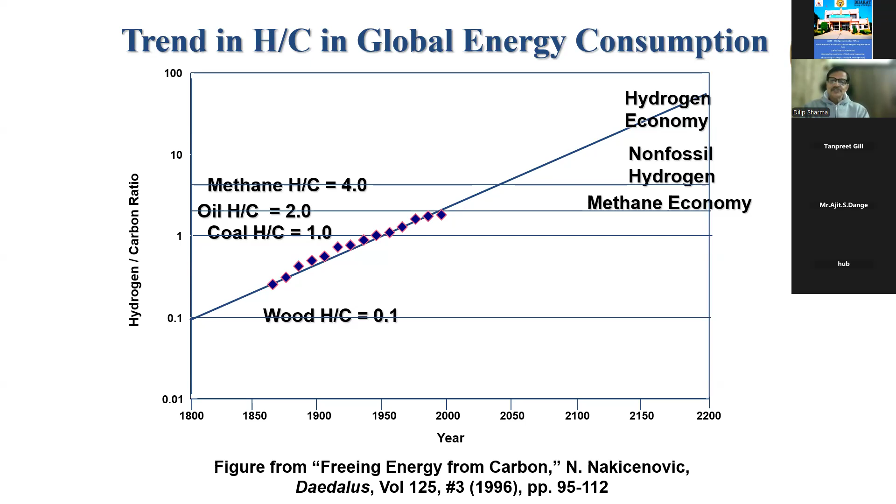And if we extrapolate this, we can say the future fuel would be a fuel in which the hydrogen by carbon percentage would be infinite, which means we'll not have any carbon in the fuel, and that fuel would be hydrogen. So the trends are also indicating that hydrogen is going to be the future fuel for us.

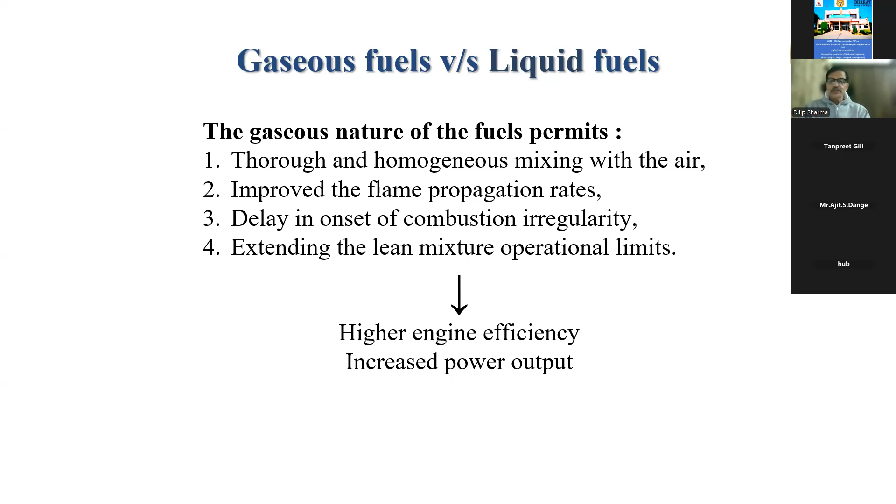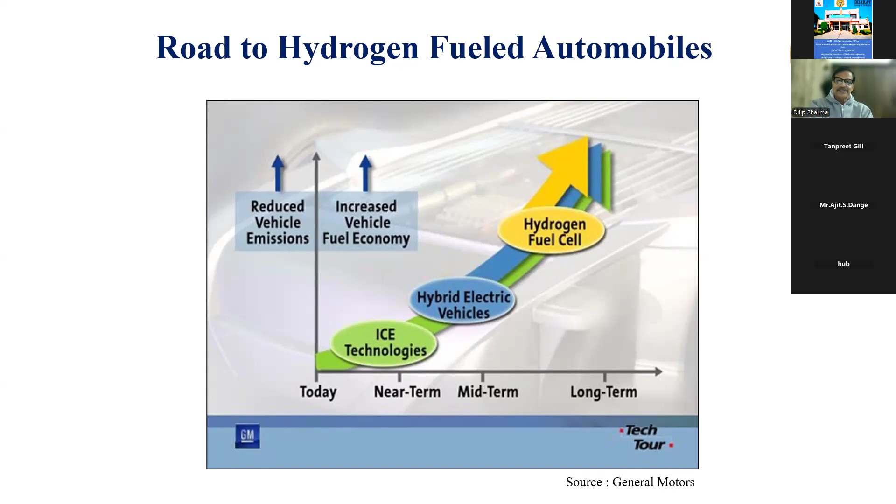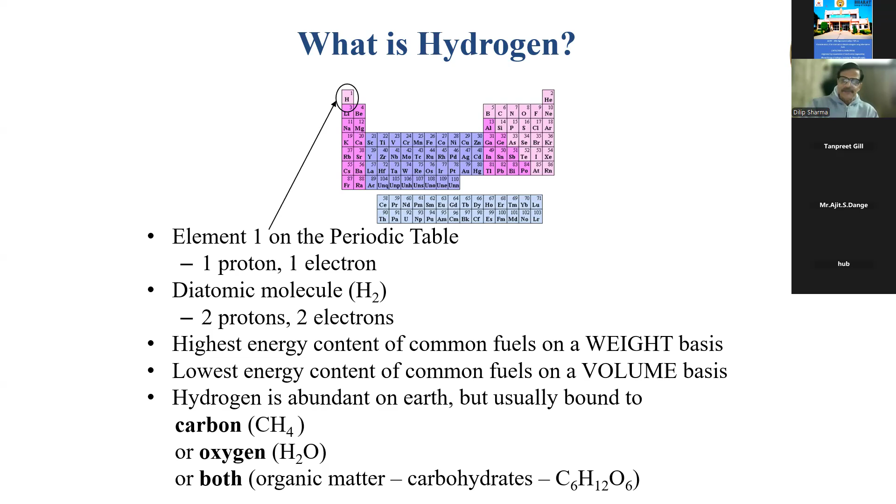Hydrogen is abundantly available combined with carbon or oxygen, examples being methane and water. All organic matter contains carbon, so carbon is abundantly available. Hydrogen is not found in abundance in a pure state, but it's always found in a bound state with carbon or oxygen. It's the most abundant element available in the universe.

It's a gas under standard conditions. It liquefies at minus 253 degrees centigrade. Another interesting thing, it's odorless, colorless, non-toxic and non-carcinogenic. That means if there's a leakage of hydrogen, you won't be able to see it or smell it. That's why the hydrogen cylinders being supplied nowadays intentionally have odorant and colorant added to them.

Hydrogen burns very fast, so it's a highly flammable gas. Since there's no carbon available in the fuel, it will not produce carbon monoxide, carbon dioxide, or particulate matter. Because it has no carbon, the flames are not visible since it burns without a flame. Now, when it burns in an internal combustion engine, because of higher temperatures, it reacts with the nitrogen available in the atmosphere and produces NOx. So that's the only emission hydrogen-fueled engines would produce, NOx emission.

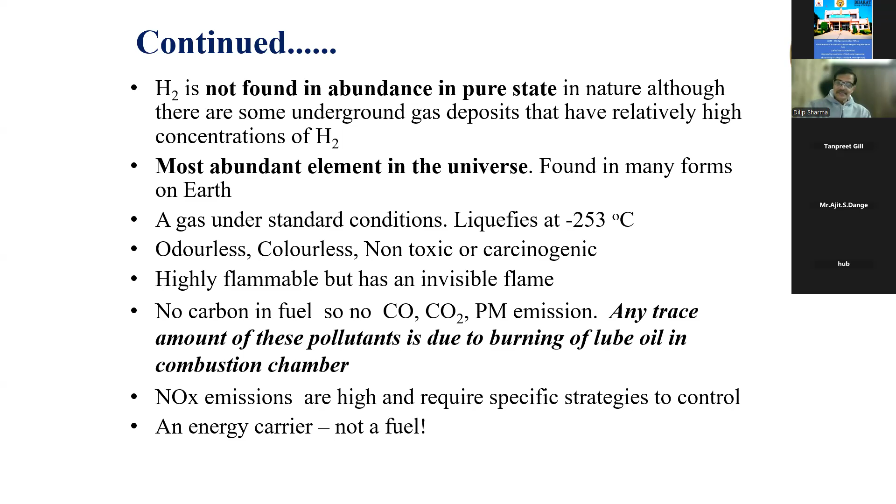And we can call it an energy carrier, not a fuel.

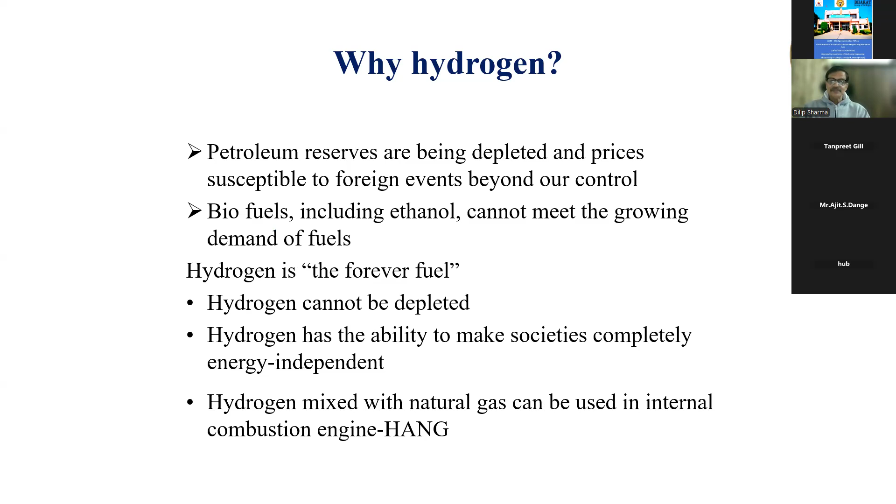Why should we go for hydrogen? As you all know, petroleum reserves are being depleted, and prices are susceptible to foreign events. If you talk about biofuels, including ethanols, they cannot meet our growing demand. So hydrogen is a fuel forever. Hydrogen cannot be depleted. Hydrogen has the ability to make societies completely energy independent. And when you mix hydrogen with natural gas, it is called HANG.

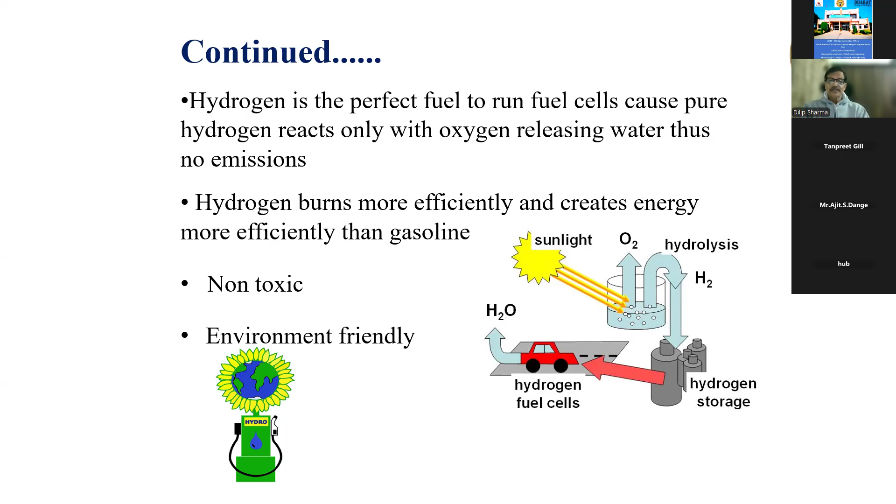Hydrogen is the perfect fuel to run the fuel cell because its pure form reacts only with the oxygen in the fuel cell and produces water. You all know hydrogen fuel cells are quite common, and we've heard a lot about them. A lot of research is going on with hydrogen-based fuel cells, and the end product of a hydrogen fuel cell is water and electricity. Hydrogen burns more efficiently and creates energy more efficiently than gasoline, as I've told you. It's non-toxic and environmentally friendly. So these are the attractions.

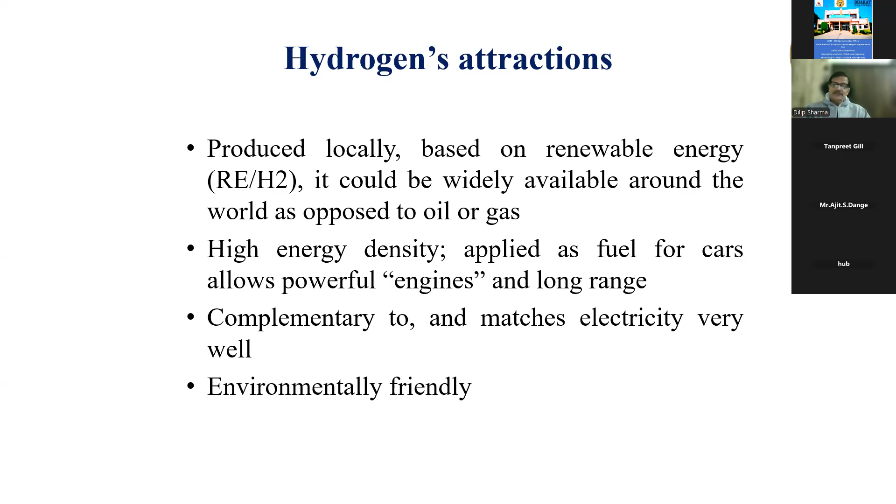Attractions are further that it can be produced locally and considered a renewable energy source. It has high energy density on a mass basis, and it's complementary to, and matches, electricity as well. And of course, it's environmentally friendly.

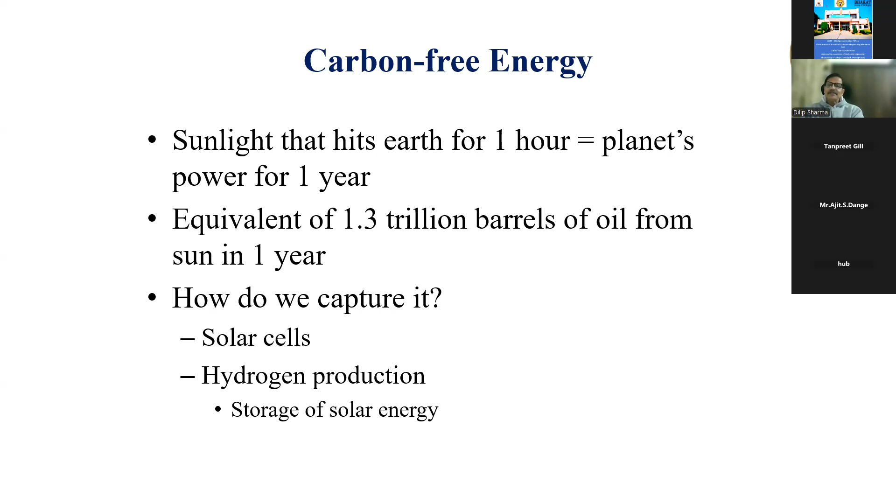When you talk about carbon-free energy, sunlight that hits the earth for one hour is equal to the planet's power requirement for one complete year, equivalent to 1.3 trillion barrels of oil from the sun. How do we capture it? We can use solar cells, which could act as a source of hydrogen production. What can be done is use a solar cell to produce electricity, to disintegrate water into hydrogen and oxygen, store them in a different place, and then transport the hydrogen. That's the simplest way of producing hydrogen.

If you look at the supply and demand of hydrogen, you can produce hydrogen from coal, natural gas, biomass, solar thermal, through renewable energy systems involving solar photovoltaic, hydro, wind, nuclear electric methods, and nuclear heat.

The areas where we can use hydrogen are internal combustion engines and fuel cells, where in fuel cells you can use it in fuel cell driven engines. Commercially, you can use it in fuel cells for residential applications, wherein you use the fuel cell developed energy to heat as well as electrify buildings, and for tertiary applications, polygeneration, and so on. And of course, we all know hydrogen is used in rubber industries as well. So hydrogen has got vast use.

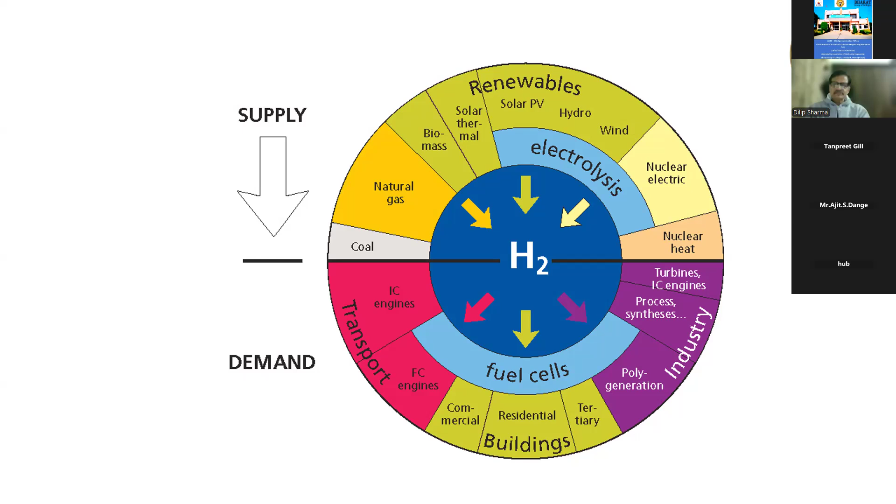Now, I have talked a lot about the qualities and benefits of hydrogen, and why we haven't used it till now. The energy efficiency of the complete hydrogen cycle - that means starting from the method by which we produce the energy, store the energy, distribute the energy, and use the energy - all four things, that cycle involves a lot of barriers. Because of that, the cost of the life cycle of a hydrogen-based system has increased significantly.

People are working in different sections. A lot of groups are working in the direction of production of hydrogen. Other groups of researchers are working to store it and to distribute it, and another set of scientists and engineers is working on the use of hydrogen.

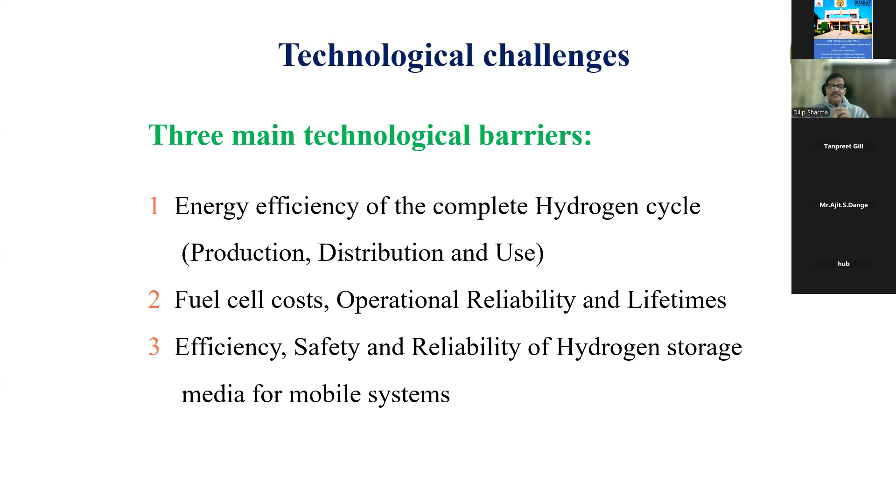Fuel cell - again, if we talk about the hydrogen operated fuel cell, the cost of hydrogen operated fuel cells is significantly high, and the reliability and the lifespan is a big challenge. So at present, the cost is significantly high and the lifespan is quite less. At the same time, fuel cells need a highly purified form of hydrogen if you intend to use it. The third challenge is the efficiency, safety, and reliability of hydrogen storage, and the media for mobile systems. So all these are the factors.

Now, coming to some of the major properties related to hydrogen. If you consider 1 unit of gasoline, and you talk in terms of percentage, on mass basis and volume basis, methanol has 44% of energy on mass basis and 51% of energy on volume basis. Ethanol has 61% and 69%. Methane is 110% of energy content per unit mass, and per unit volume it's 29%. Hydrogen, as I've said already, has 2.6 times energy on mass basis as compared to gasoline, and has 1/5 or 20% of the energy on volume basis.

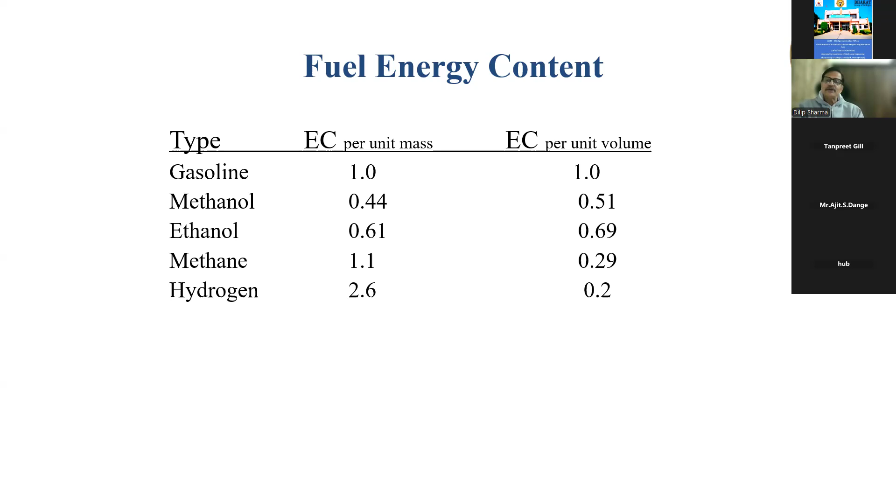Some physico-chemical properties - I have mentioned them here, but we will not be using them much. The lower heating value on mass basis is 120 megajoules per kg for hydrogen, for methane it's 48, for petrol it's 42 to 44 - so it's clearly 2.6 times that. Flammability: for gasoline it is 1:8 volume of air, and for hydrogen it is 4.1 to 74 - so it's got a wide range of flammability. You can burn extremely lean as well as extremely rich mixtures of hydrogen and air. Explosion limits are again significantly high, 18.2 to 58.9 volume of air, whereas for gasoline it is only 1.4 to 3.

Molecular diffusion is 0.6 centimeters square per second as compared to 0.05 centimeters square per second for gasoline. So in case of a leakage, it spreads out and diffuses very fast, which sometimes makes it more inherently safe. Another property which makes hydrogen a safe fuel is the auto ignition temperature, that is 571 degrees centigrade as compared to close to 380 to 400 degrees centigrade for gasoline. Liquid density is 77, whereas for gasoline it's 720 to 780.

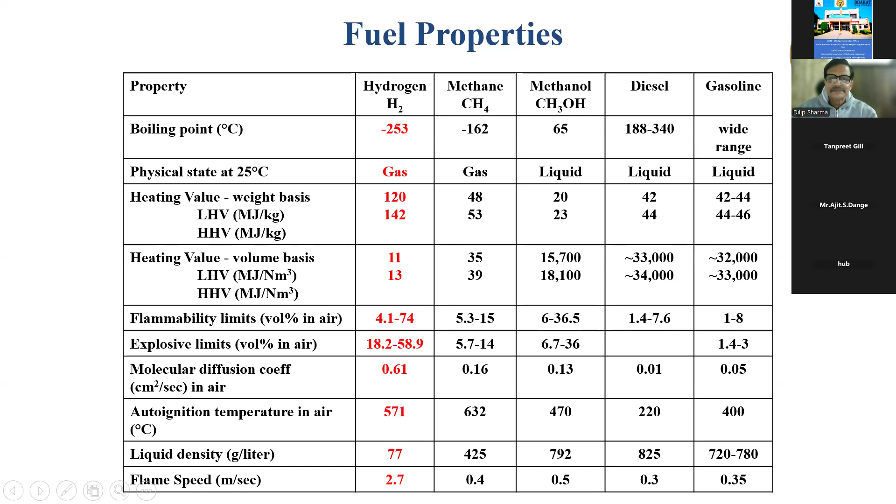So let's quickly move to other properties: ignition energy, flame speed, and so on.

As I have told you, hydrogen can be used in internal combustion engines as well as fuel cells. So what are the properties which are favorable to using it as a fuel in internal combustion engines? The first favorable property is a wide range of flammability. You can burn extremely lean air-fuel mixtures where you don't want the engine to give extra power but just keep the engine running, and you can go to a very rich air-fuel mixture wherein you would like to produce significant amount of energy. So within a very wide range we can operate hydrogen, and from the same size of engine, you can produce a large amount of energy. Low ignition energy.

To start combustion, unlike spark ignition engines, you require very little energy to initiate. You don't require big spark plugs. Even a small source of heat can initiate combustion. There are small quenching distances, and high auto-ignition temperature makes it inherently safe. High flame speed at stoichiometric ratios means combustion is completed very fast, so you can produce more energy. It is highly diffusible with very low energy density on a volume basis.

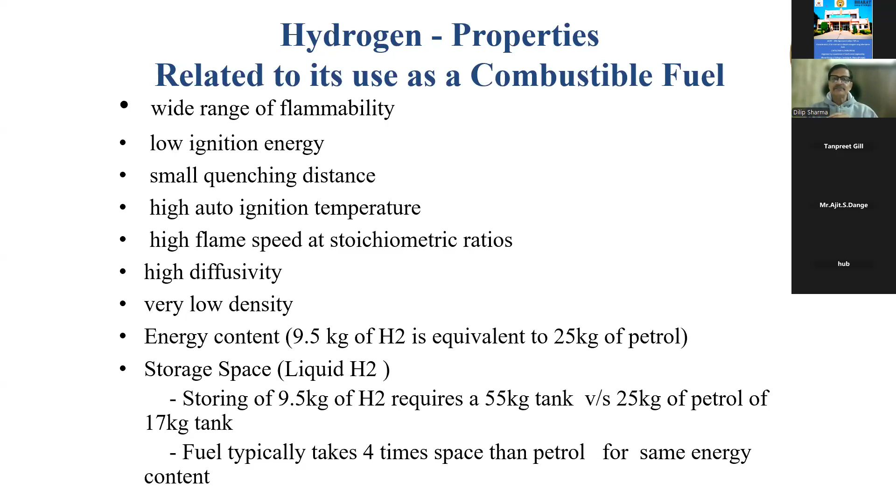If you're storing hydrogen, to store the same amount of energy, you require 9.5 kgs of hydrogen to have energy equivalent to 25 kgs of petrol. In order to store 9.5 kgs of hydrogen, you require a tank, because you have to store it at high pressure, that weighs 55 kgs. Whereas to store 25 kgs of petrol, the tank will weigh only 17 kgs. So that is a main challenge, storing hydrogen. Typically, the fuel if it is in a gaseous state takes 4 times the space in volume compared to petrol to produce the same amount of energy. If we pressurize it, the volume requirements tend to decrease, as shown here.

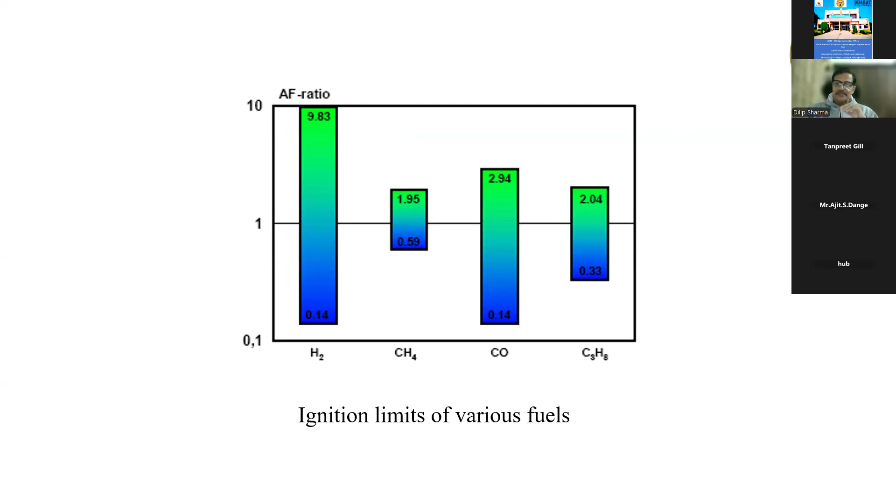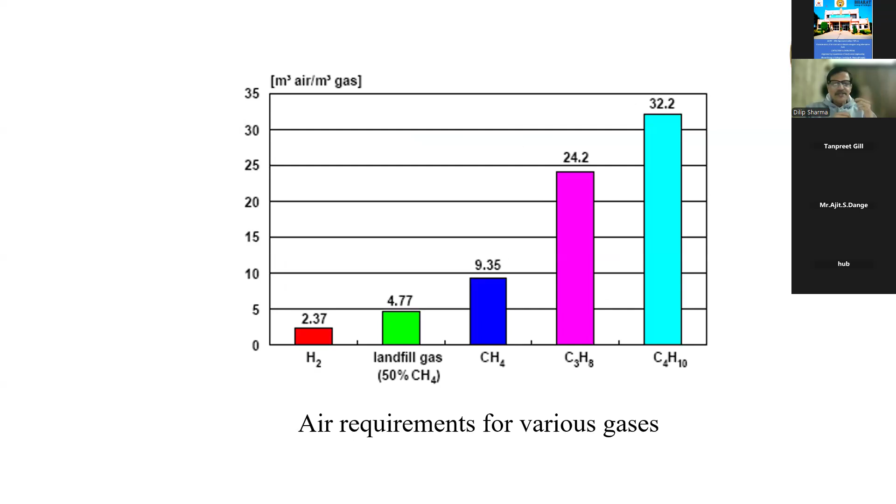You can do de-throttling also to get the benefit of lower volume of fuel being burned under idling conditions.

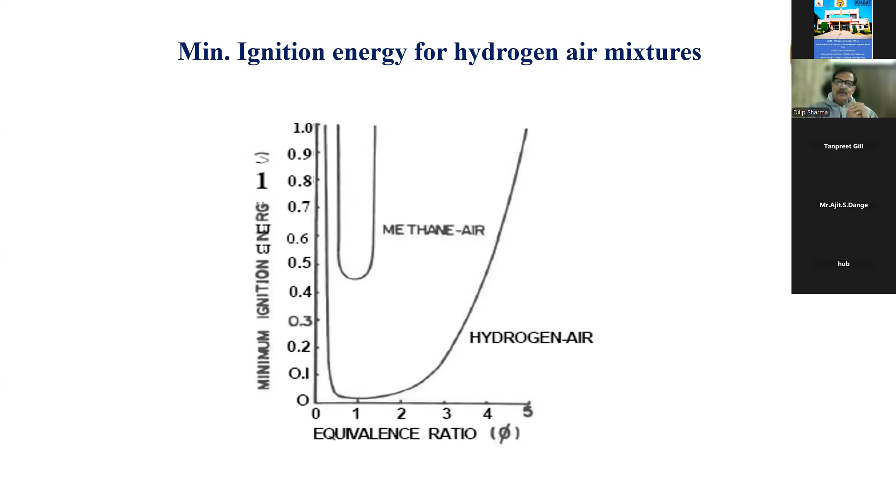Ignition energy - these curves are just indicative of how much energy is required. In order to initiate combustion in hydrogen, you require very little amount compared to methane energy. NOx is again a challenge in this, because hydrogen burns very rapidly.

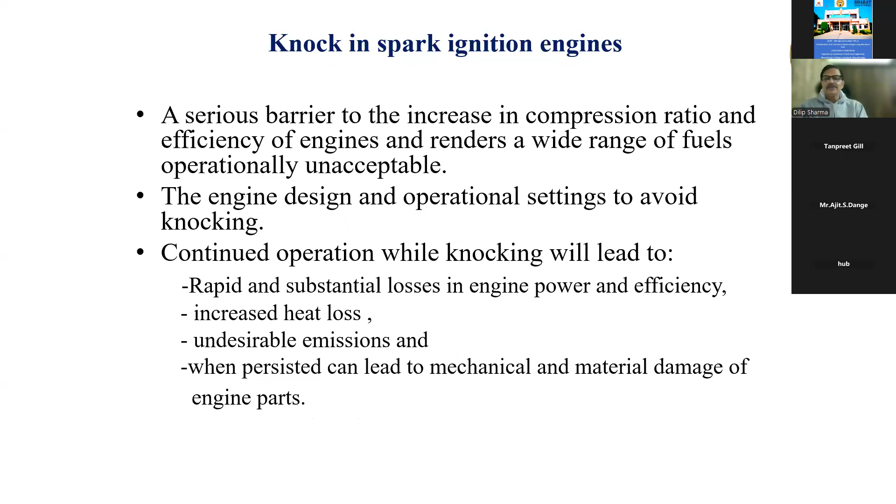If it is burning very rapidly, there will be a sudden pressure rise once combustion gets initiated. So that needs to be controlled, and you need to design a combustion chamber which can handle the knocking.

High flame speed - hydrogen burns 9 times faster than gasoline and 14 times faster than diesel. So it burns very rapidly. When it burns very rapidly, it is at times advantageous also.

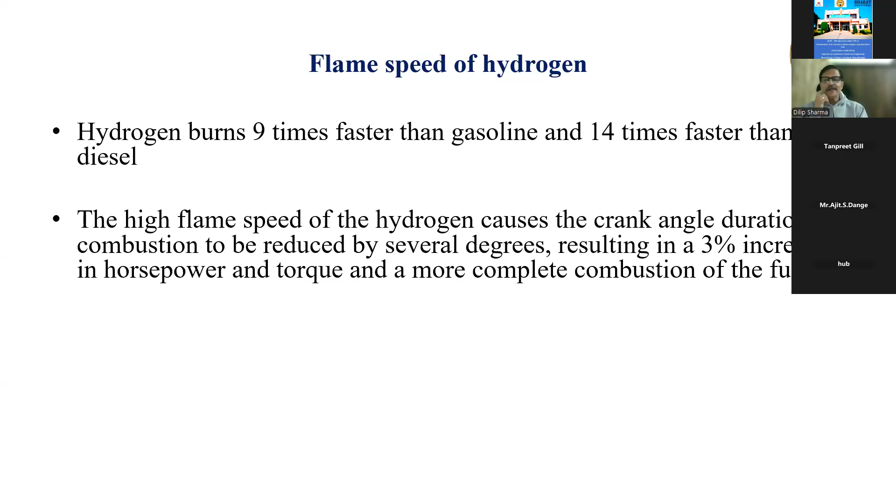High flame speed of hydrogen causes crank angle duration of combustion to be reduced by several degrees, because you don't require the spark to be much advanced. You need to retard it.

Other issues - because the energy required to start combustion is much less, the spark plug gap can be reduced.

Deterioration of lubricating oil - because hydrogen is the lightest element, it can leak out between the walls of the piston ring and cylinder and mix up with the lubricating oil, causing dilution of the lubricating oil.

Similarly, it has a very high affinity for oxygen and can operate on a wide range of oxygen. So the oxygen sensors installed in engines need to be highly sensitive and highly calibrated - very accurate O2 sensors are required.

The advantage of lean mixtures to operate at low load conditions is always good. The disadvantage is increased hydrogen concentration in the exhaust gas and during idling.

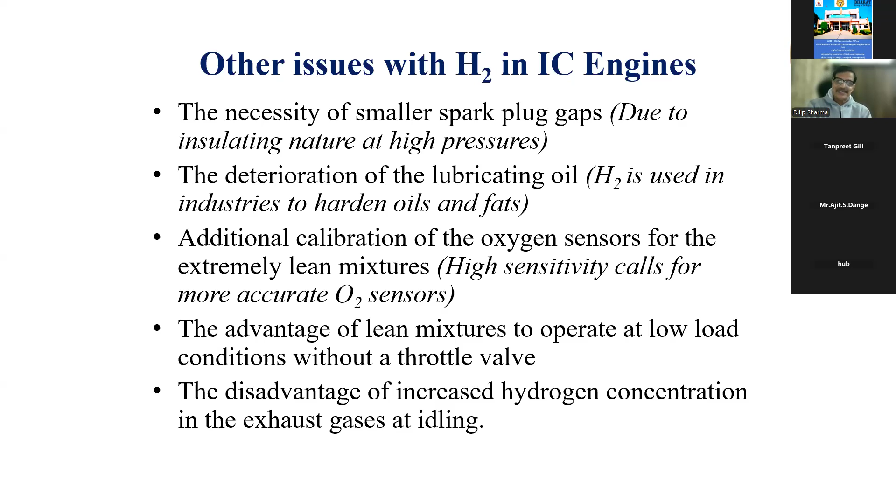The advantages - since there is no carbon, you'll not find any carbon monoxide, carbon dioxide, or particulate matter, because there is no carbon in it.

If at all some carbon is appearing, that could be because of mixing of the lubricating oil going out from the combustion chamber. Any amount of these pollutants is because of the lubricating oil coming out. NOx emissions are high, so we need to take care of that.

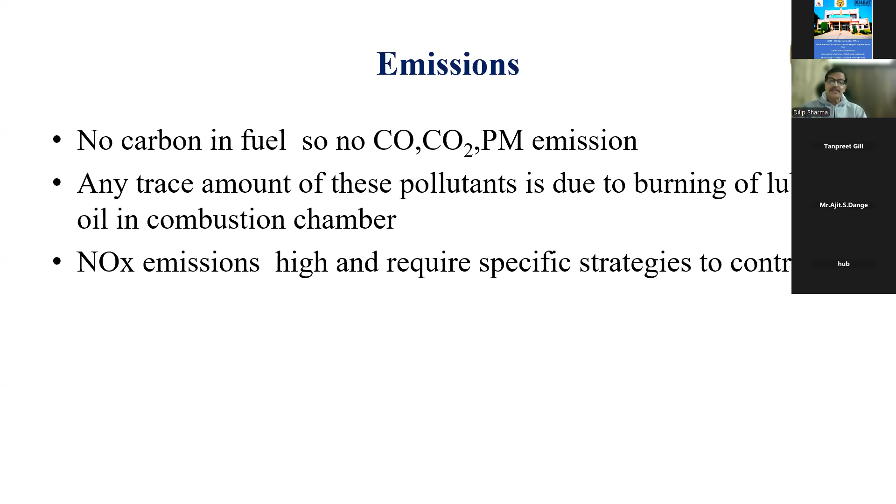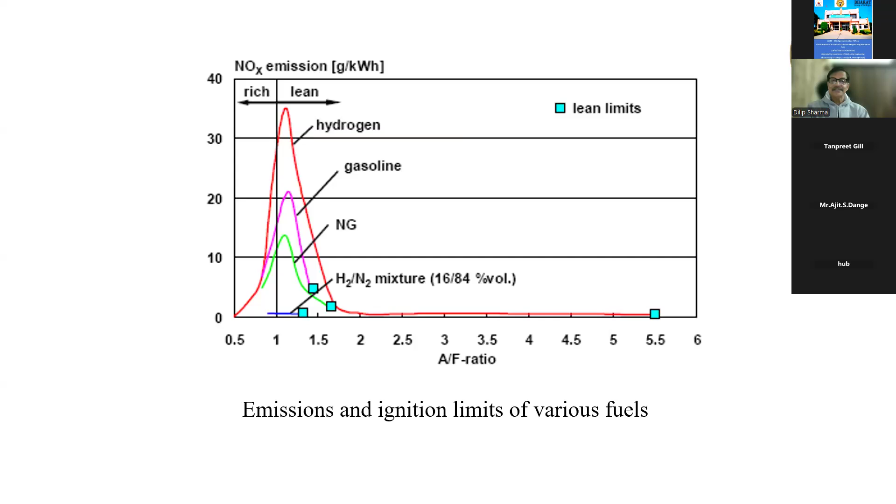Hydrogen, being the smallest and lightest element in nature, diffuses rapidly into the surroundings to a non-combustible proportion, and as you all know, it diffuses 3.8 times faster than air.

So what happens if there is a leak somewhere - it spreads and diffuses into the atmosphere very fast, much faster than gasoline. So when it diffuses fast, the probability or chances of catching fire is less.

You might have seen on TV, LPG companies advertise that if gas leaks, you need to open up your windows from the kitchen and stop the stove so that whatever gas has leaked out can diffuse away. This diffusion is even much higher than LPG in hydrogen's case. So it diffuses out very fast, forming a non-combustible mixture, which makes it inherently safe.

Hydrogen fires burn very rapidly and radiate very little heat, thus are relatively short-lived. This is again another important point.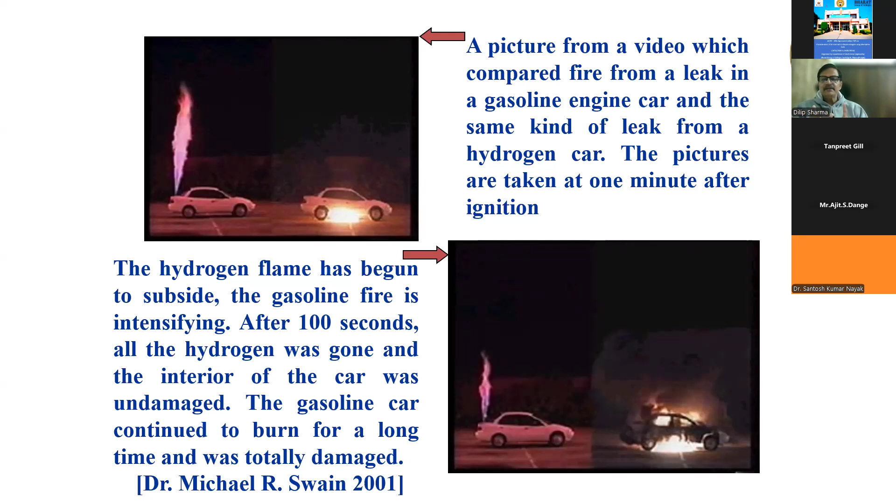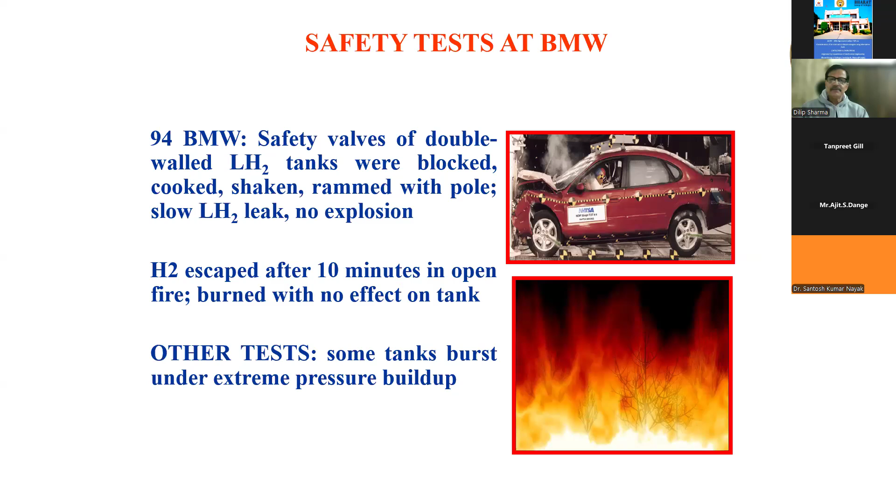a hydrogen tank. This clearly indicates that even if there is a fire on a hydrogen car, it would be relatively safe, and the entire vehicle will not burn as compared to a gasoline-based vehicle. Because of its highly diffusible nature and high combustion speeds, this fuel is inherently safe. People have done a lot of other tests also, and H2 escapes faster. So these issues have been resolved.

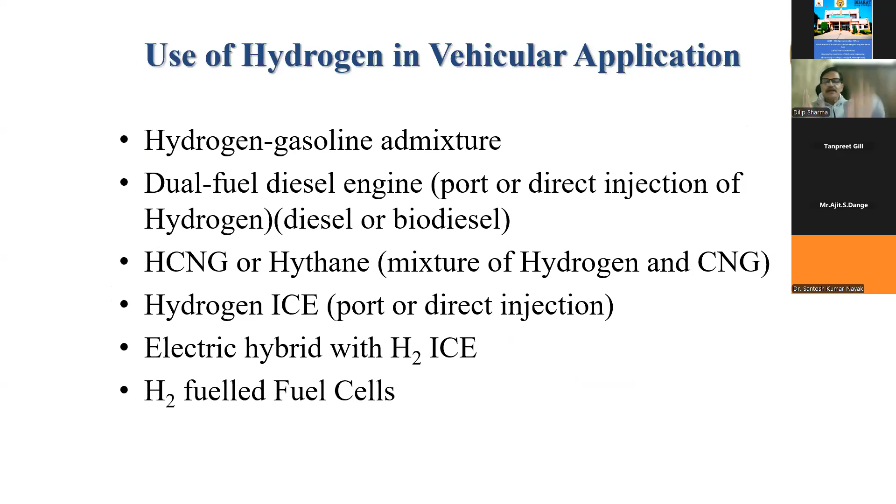All these different techniques which I have mentioned cannot be adopted and are not being adopted directly in the present scenario. The government has set up a National Hydrogen Energy Board under the Ministry of New and Renewable Energy, MNRE, the NHEB, and it defines near-term, medium-term, and long-term goals of using hydrogen in automobiles.

In the near term, it is decided to use hydrogen plus CNG in internal combustion engines. In the medium term, we'll switch from hydrogen and CNG to pure hydrogen in internal combustion engines. In the long term, we can think of using pure hydrogen in fuel cells. Why has it been done? Because making people understand and adopt the technology very quickly is not that easy.

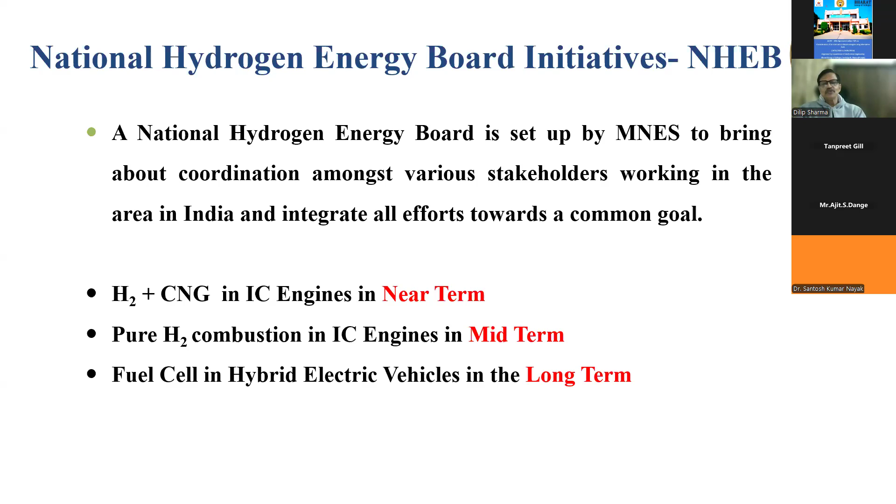The CNG which is being provided nowadays is not pure CNG. It's not pure methane. It is a mixture of hydrogen and CNG, and that is being provided to allow people to have a first-hand experience of how hydrogen can be used in internal combustion engines in automobiles. In later stages, in the medium term, we will be switching to pure hydrogen tanks, wherein we will not be using CNG tanks but hydrogen tanks, and hydrogen would be purely supplied to the internal combustion engine. And long term, we will be switching over to use of hydrogen in a fuel cell, not in an internal combustion engine.

What does the project overview say? Near term, what we can do is we can use CNG tanks, wherein we will be mixing hydrogen in CNG and using it. Percentage of mixing of hydrogen can be from 10 to 30%, but nowadays we are having only 8% hydrogen blending in the CNG. The vehicles operated are buses, cars, and three-wheelers. Medium term, we will be using compressed hydrogen or metal hydride based tanks, wherein we can store hydrogen, and this pure hydrogen would be supplied to the internal combustion engine to produce heat.

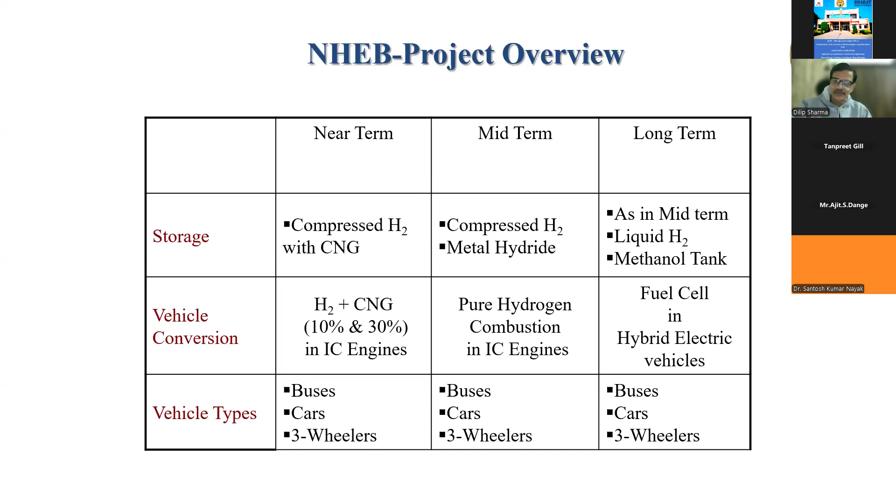So government straight away decided nothing doing. We will not be modifying the engine, we will not be modifying the vehicle. We'll be using the same vehicle, but we'll be adding some percentage of hydrogen in the CNG driven vehicle. And people might not even be knowing that a significant percentage of hydrogen is there in the CNG which they are using. So what will be the result? People will be confident, we have been using hydrogen, so it will not be anything dangerous for us. So it allows the use of existing technology and existing methods for operating the system.

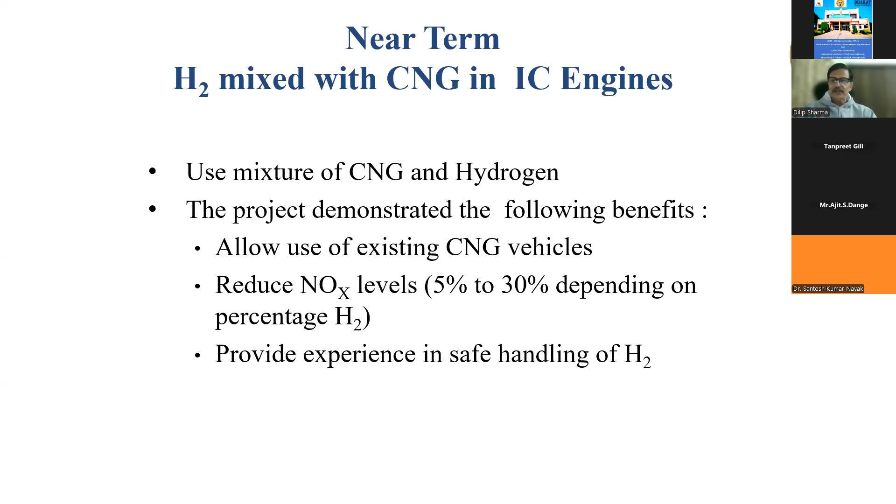One is called HANG, hydrogen added natural gas. In HANG various percentages could be there, from 8 to 50%, whereas Hythane is a standard trade name given to a blend of hydrogen and CNG, wherein 20% of hydrogen and 80% of CNG is mixed by volume. So Hythane has a fixed percentage of hydrogen, and this is the registered trademark of Hydrogen Consultants Incorporation in USA. So we cannot call a mixture of hydrogen and CNG Hythane unless we have 20% hydrogen and 80% CNG by volume in that.

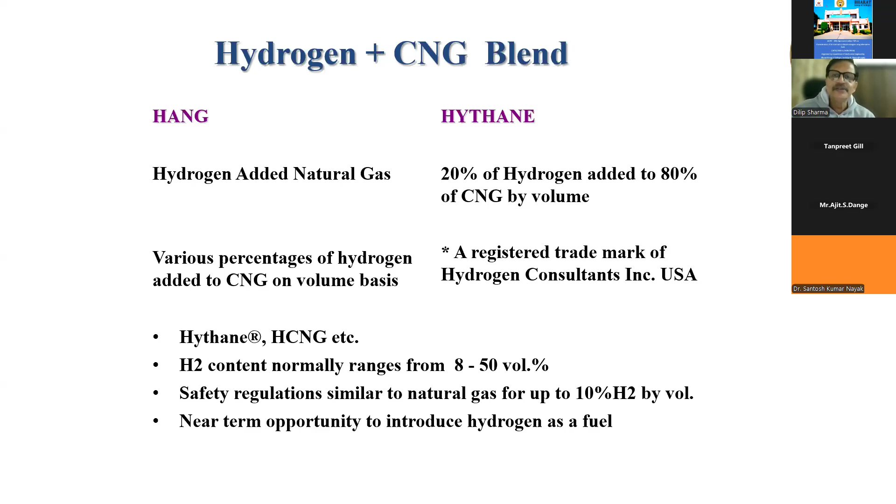But HANG is a generalized term, so we can use HANG or HCNG, wherein we can have 8 to 50%, and presently we are using 8%. For safety, we do not normally go beyond 10% in our country. So we have already met the requirements of the near term because CNG filling stations already exist, CNG driven vehicles exist, we don't need to make many changes. So we have already adopted use of hydrogen in internal combustion engines in the form of CNG driven vehicles.

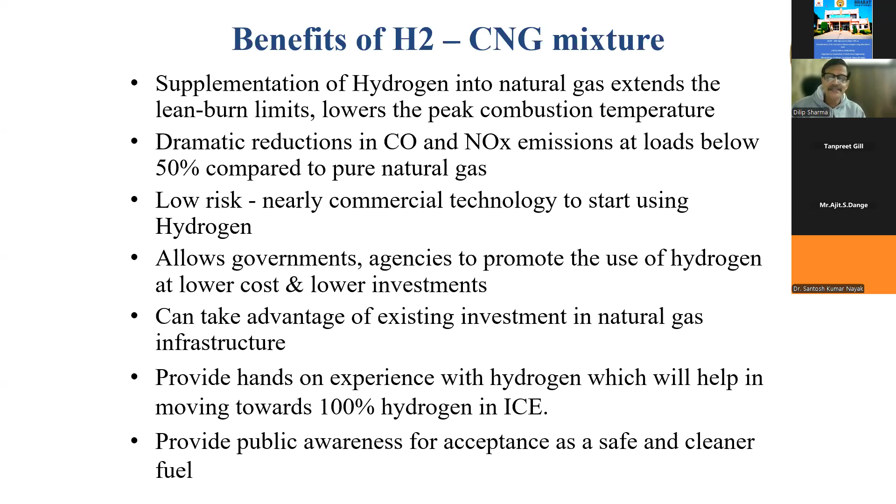What is the benefit of this? Supplementation of hydrogen into natural gas extends the lean burn limits, lowers the peak combustion temperatures, and dramatically reduces carbon monoxide and NOx emissions. Low risk and nearly commercial technologies start using hydrogen, allowing government agencies to promote use of hydrogen at a lower cost, can take advantage of existing investment in natural gas infrastructure, and we can later switch to 100% hydrogen based vehicles. This is a simple HCNG genset available at IIT Delhi. We had HCNG dispensing stations long back in 2005 by Indian Oil Corporation.

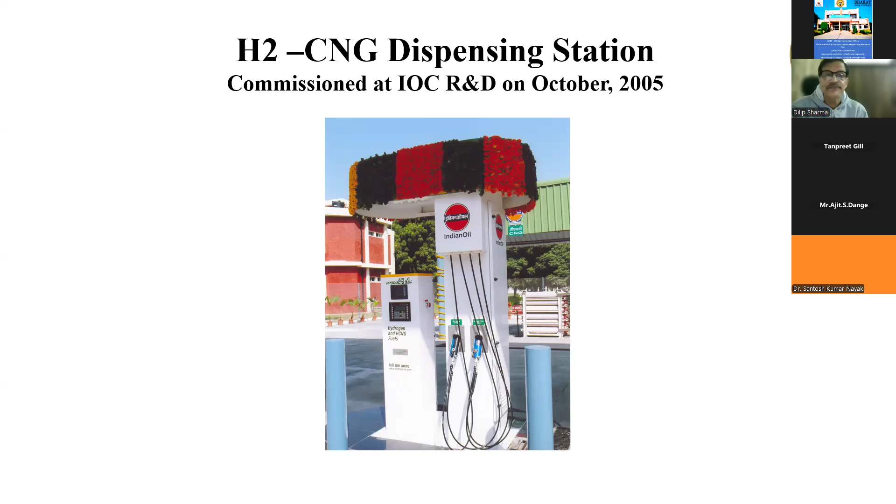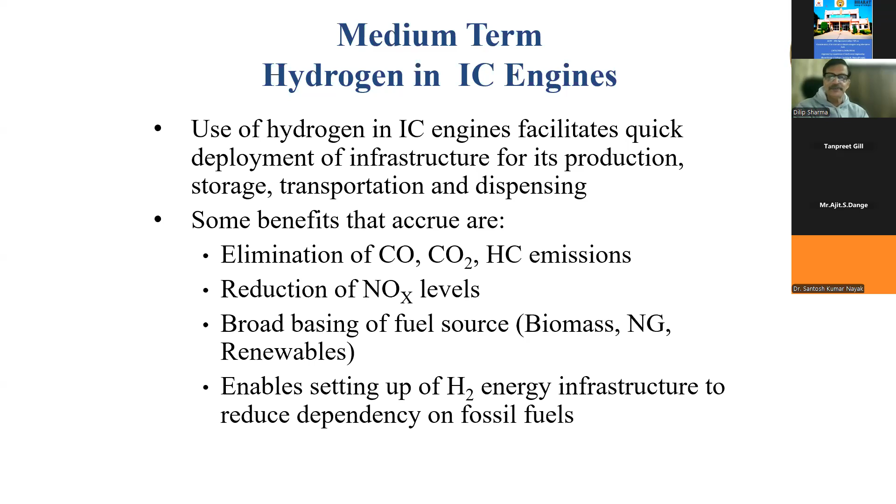Hydrogen in internal combustion engines. Issues are that complete control of combustion processes is yet to be achieved. Increased resistance to backfire is needed; backfire is a big challenge in hydrogen. For direct injection of hydrogen, an electronic management system, ECM, is required.

Optimization of engine parameters needs to be done. So you need to have an entirely new design engine, or you need to optimize the ignition timing, injection timing, duration for injection and the injection pressure over here. Special focus needs to be taken care on the ignition characteristics.

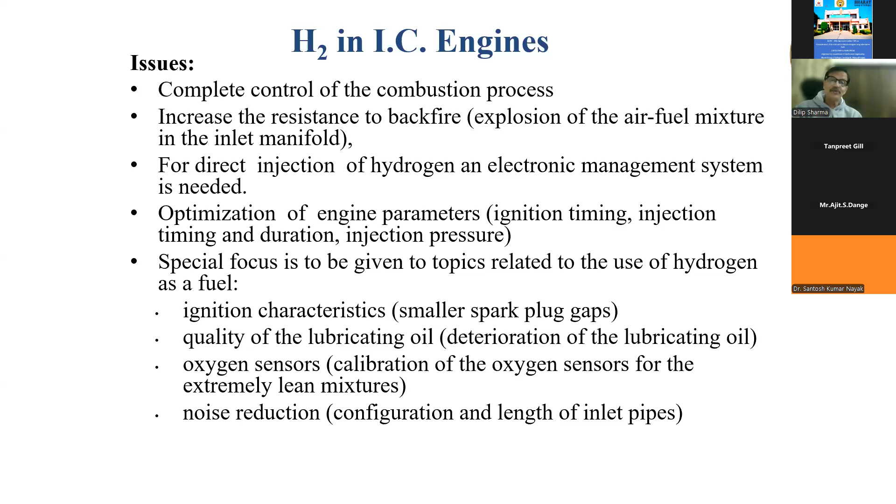So these are the issues which have to be taken care when you are using pure hydrogen as compared to the near term. Near term में हमको कोई changes करने की जरूरत नहीं पड़ी थी.

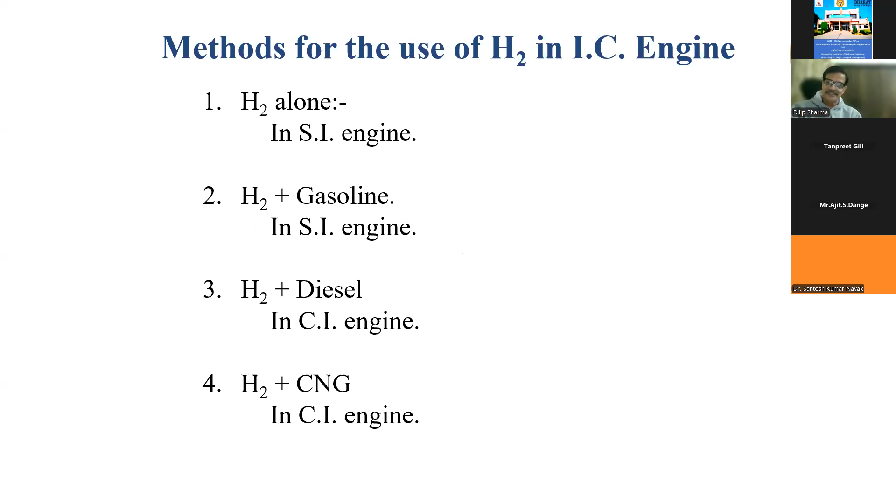हाइड्रोजन को कैसे इंजेक्ट करेंगे इसके अंदर? You can use hydrogen alone in a spark ignition engine. You can use hydrogen plus petrol in a spark ignition engine. You can use hydrogen plus diesel in a compression ignition engine. You can use hydrogen plus CNG, जो already मैं discuss कर चुका हूँ. The fourth one has already been adopted.

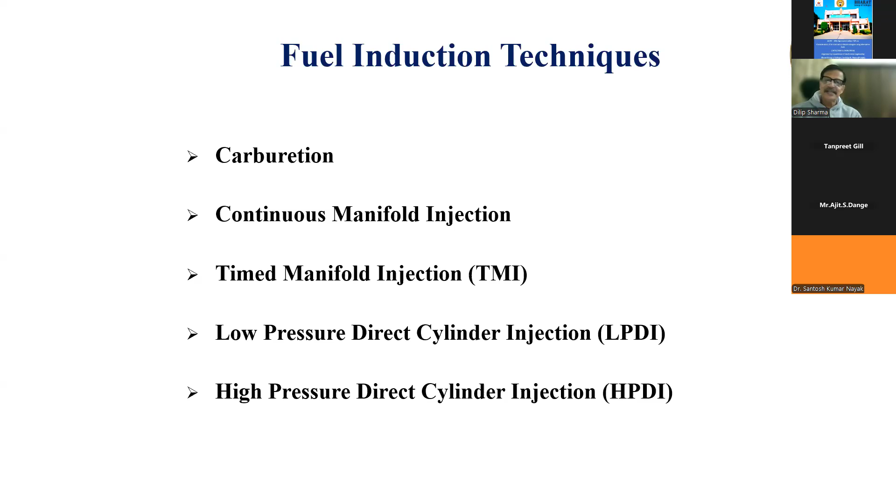Fuel supply करने की कौन कौन सी techniques होती हैं? Carburation is the one. Then you have continuous manifold injection, timed manifold injection, low pressure direct injection, and high pressure direct injection. इनकी slides मैं आपको और elaborate करूंगा.

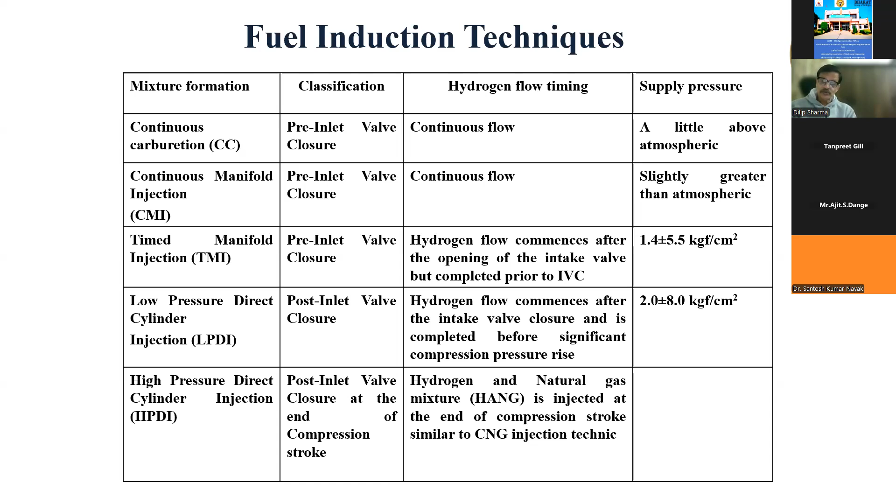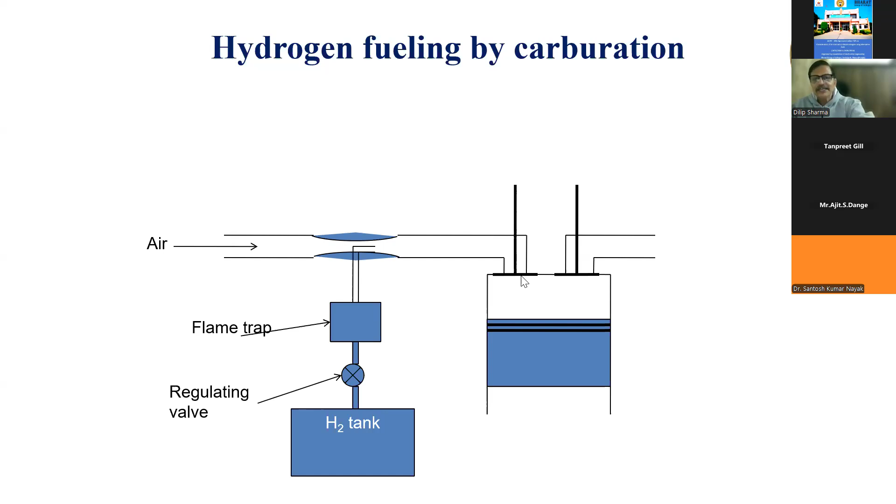We have put a flame trap so that the hydrogen flame doesn't go back to the fuel tank. And then in this process, you don't have a direct control. You have to control through the regulating valve. तो इनलेट मैनिफोल्ड में अगर आपने शुरू में ज्यादा हाइड्रोजन दे दी और आपकी एकदम से रिक्वायरमेंट बंद हो गई, so it will take some time for the entire fuel to burn in the inlet manifold.

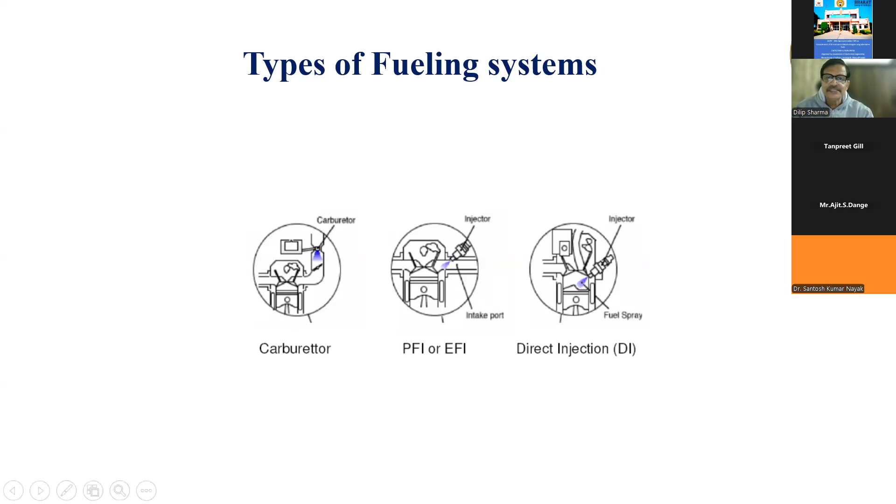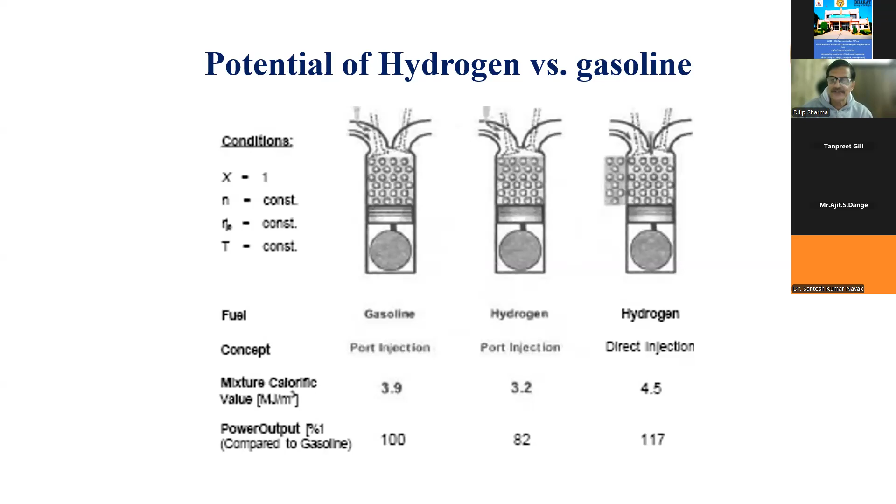If you see, in port injection, mixture calorific value is 3.9 megajoules per meter cube. Power output, if it is assumed 100%, आप हाइड्रोजन के साथ पोर्ट इंजेक्शन की बात करोगे तो 82% ही रह पाएगी. But when you're using direct injection, it goes to 117. So using hydrogen in a direct injection engine, you can produce more energy.

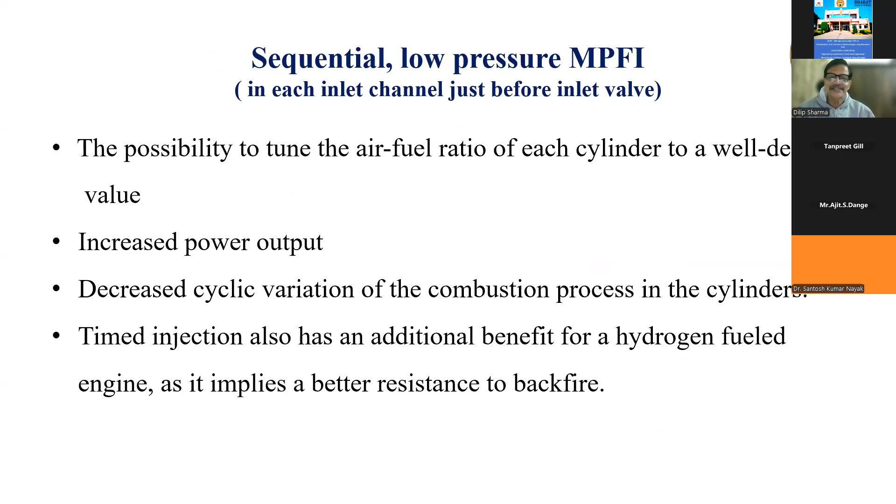Sequential low pressure multi-point fuel injection gives the possibility to tune the air fuel mixture. Increased power output, decreased cyclic variation, and timed injection is also an added benefit. So these are the advantages and disadvantages. Disadvantages: low gas energy density, high delivery in short time, durability, and possible leaks.

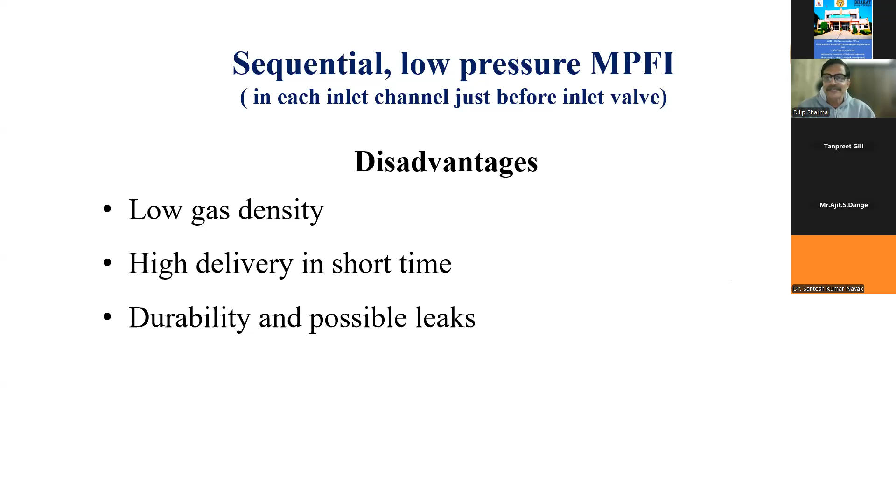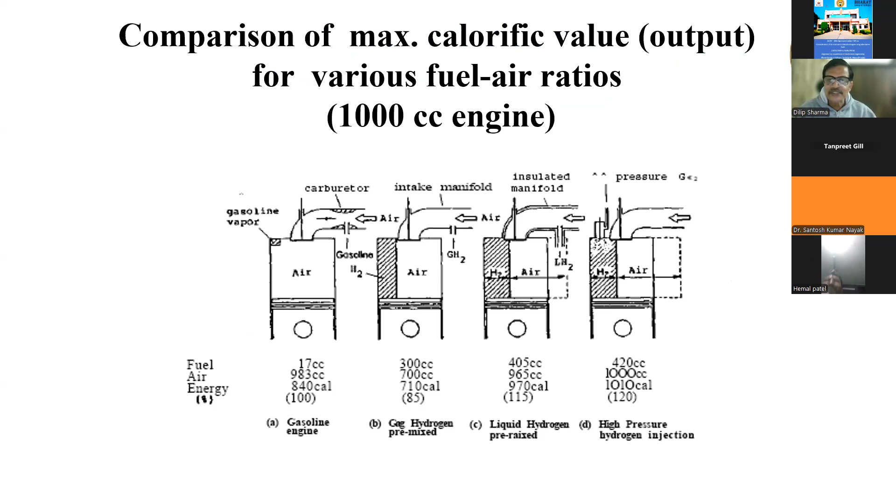One such example of a small engine of 1000 cc using different techniques was discussed, and you can see the fuel is 17 cc, 300 cc for hydrogen, for liquid hydrogen it's 405, and for high pressure it's 420.

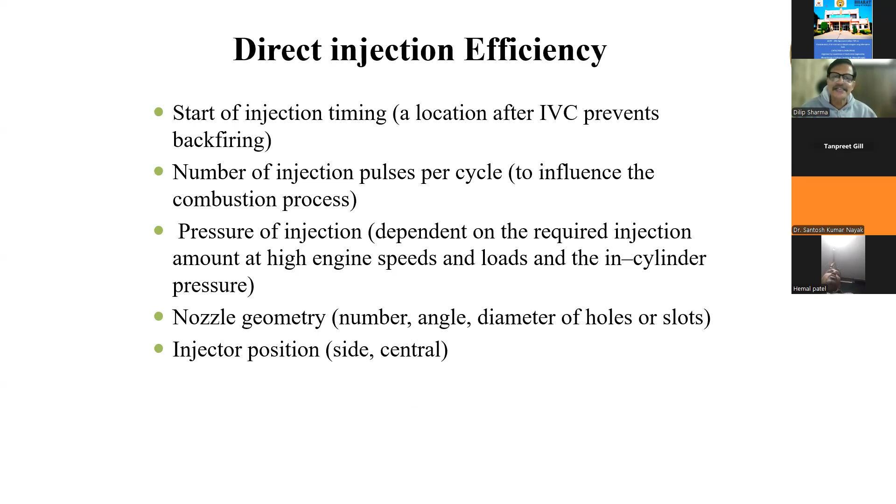So like that, to produce the same amount: direct injection efficiency, start of injection timing, location after inlet valve closing, number of injection pulses, to make it inherently safe, pressure of injection, and so on. These are advanced stages, so I'll be skipping many of these things. R&D focus किस चीज पे जाता है हमारा?

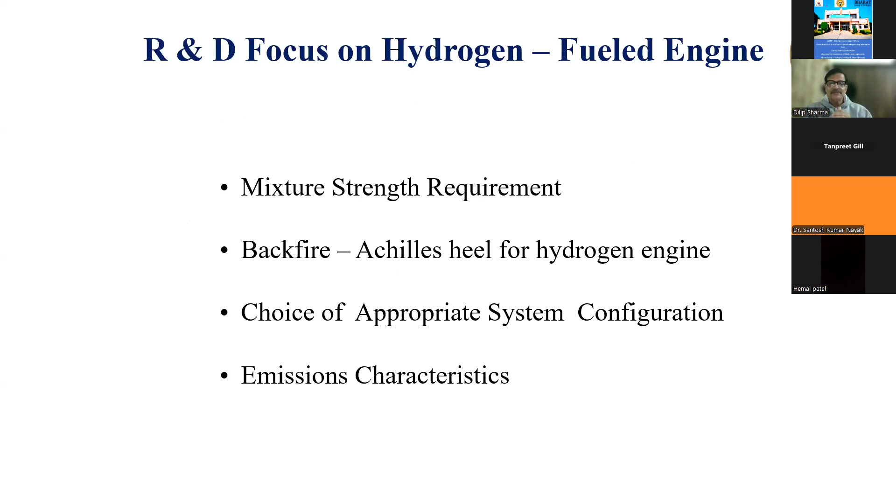So for backfire we can use ultra lean operation, adopting exhaust gas recirculation to avoid backfire as well as NOx emissions, avoiding hot spots and sharp edges, and water injection inside the combustion chamber.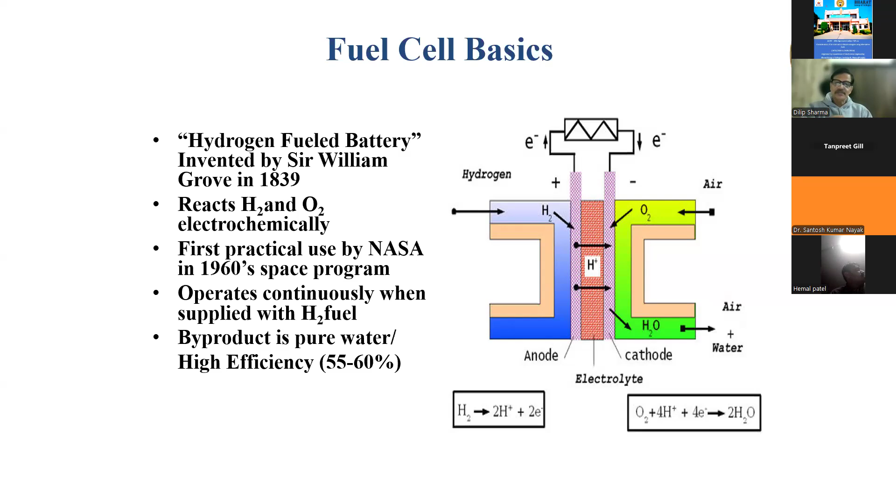सबसे simplest fuel cell की बात हुई है, hydrogen fuel cell. It was developed by Sir William Grove in 1839. Hydrogen reacts with oxygen electrochemically and produces water as emission and heat. So water vapors basically are condensed and you store water over there. The byproduct is only water, and electrical energy is being produced. They have a very high efficiency of 55 to 60%. Then different type of fuel cell का structure होता है. Type of fuel cell, you have PEM, solid polymer applications, and so on.

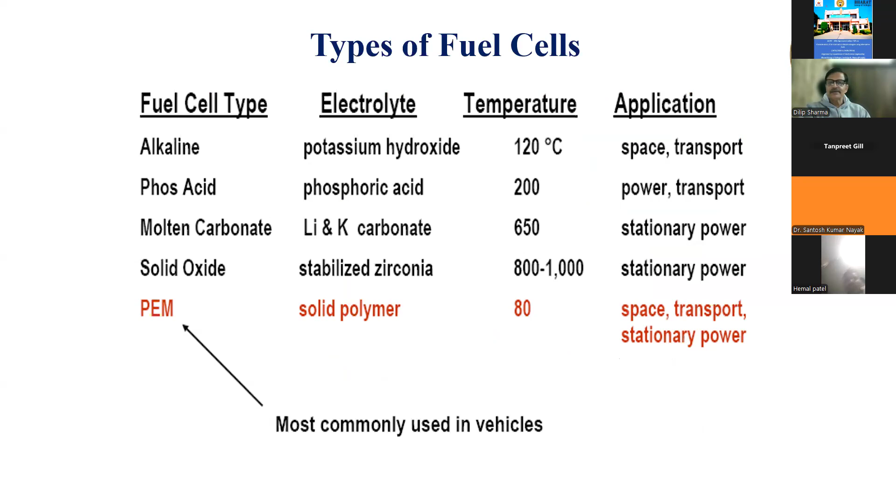Now, towards the end, I will be just quickly comparing the use of hydrogen in fuel cell and use of hydrogen in internal combustion engine. So if you see at the present scenario, the technology of using hydrogen in internal combustion engine is mature.

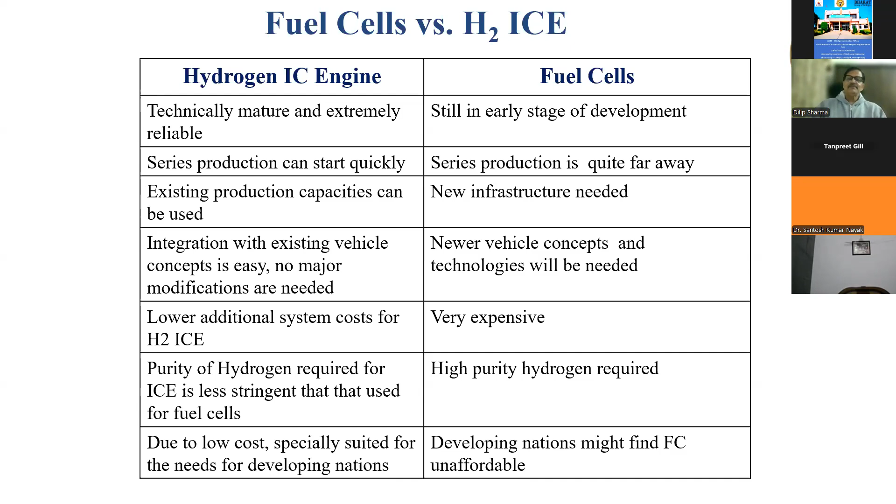Due to low cost, it's specially suited for developing countries like India, etc. And developed countries may think of using fuel cell driven vehicles in near future, but again the cost would be significantly high, so people might still not be interested in using it much. So that's all from my side.

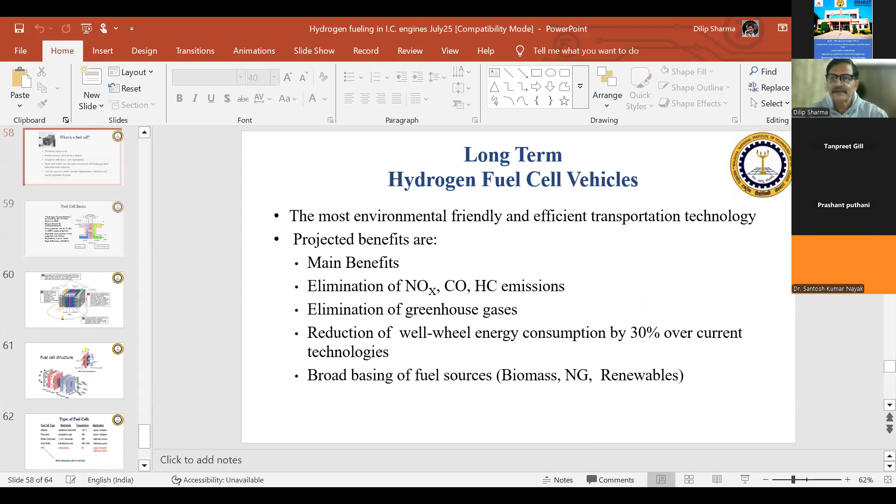Good evening, sir. Sir, I am also working on the biofuels research center itself. So I was thinking that for using hydrogen gas, we need some safety measures in the vehicles as well as the experimental process also. So in the upcoming days, what are the safety measures generally we need for using it, maybe in light motor vehicles or heavy motor vehicles?

Right. So first of all, as I've said, when we are using any fuel, you require devices for storing it properly. Then from storing to the place where you'll be using it in an internal combustion engine, that transportation is required. And then from transporting it, I'm talking about the vehicle itself. So you require a hydrogen fuel storage tank. That tank needs to be connected to the engine.

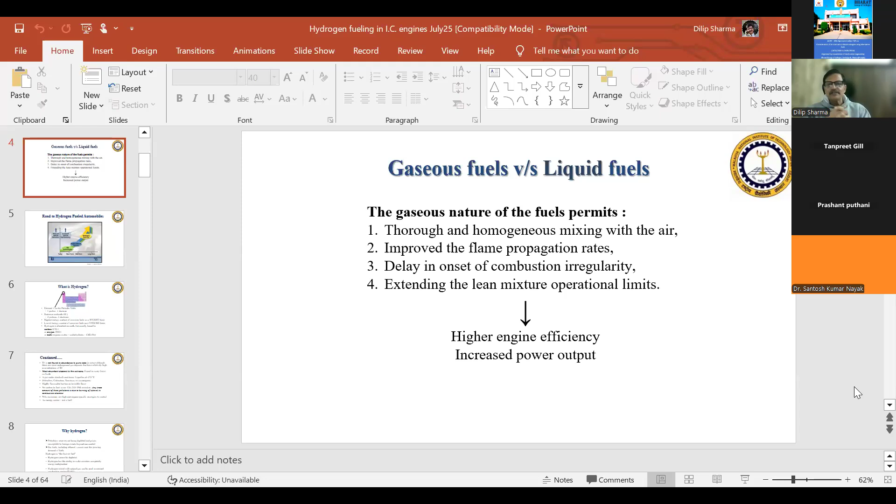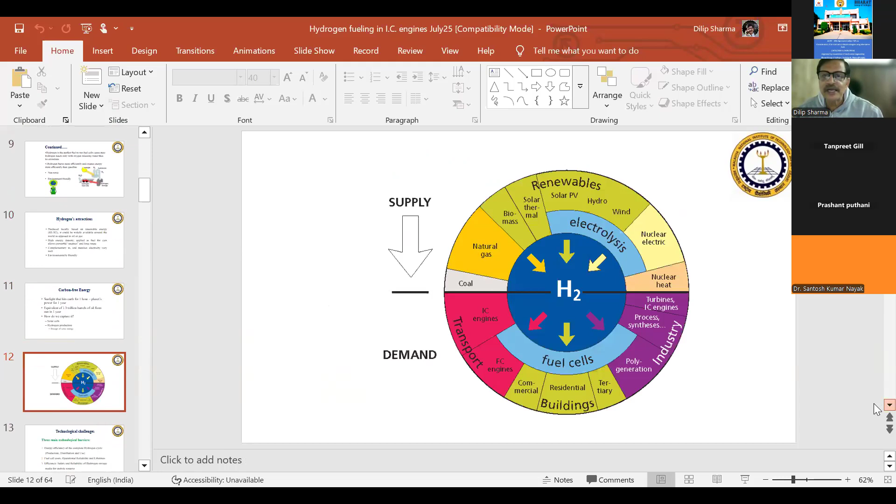Now, while connecting it to the engine, what we did in our labs, we installed flame traps as well as fire arresters along with NRVs, that is non-return valves. So these things need to be taken care of, and of course you need to take care of various other parameters to ensure that it is inherently safe. I have already shown in the presentation the safety issues.

Yes. So of course, the hydrogen which we are getting already has an odorant and a colorant added into it. So if there is a leakage, you can easily find it out. But to prevent it, what is required is from the fuel tank, you need to supply the hydrogen through an NRV and a flame trap, and then you put it to a fire arrestor.

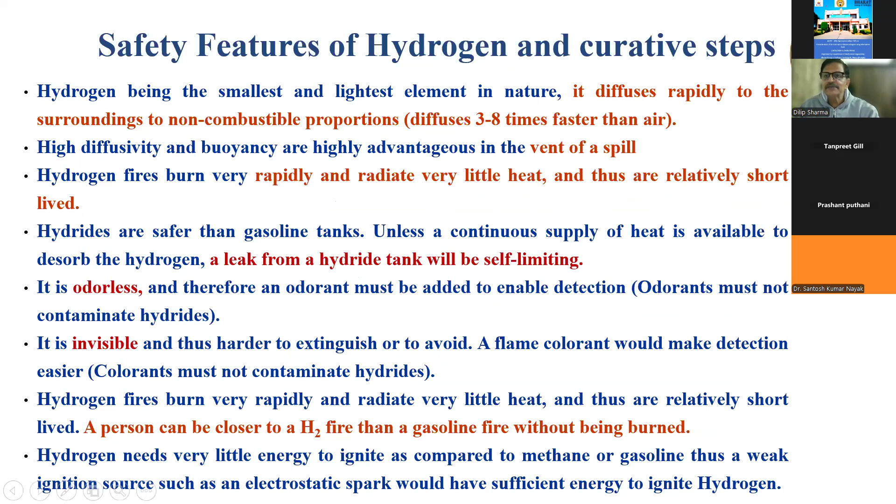Is my screen still available? Yes, sir. All right. So I'll switch to another slide over here. I have to just check. I'd like to show a presentation of one of my PhD scholars who did his PhD, and I'll be just quickly showing you a few of the diagrams.

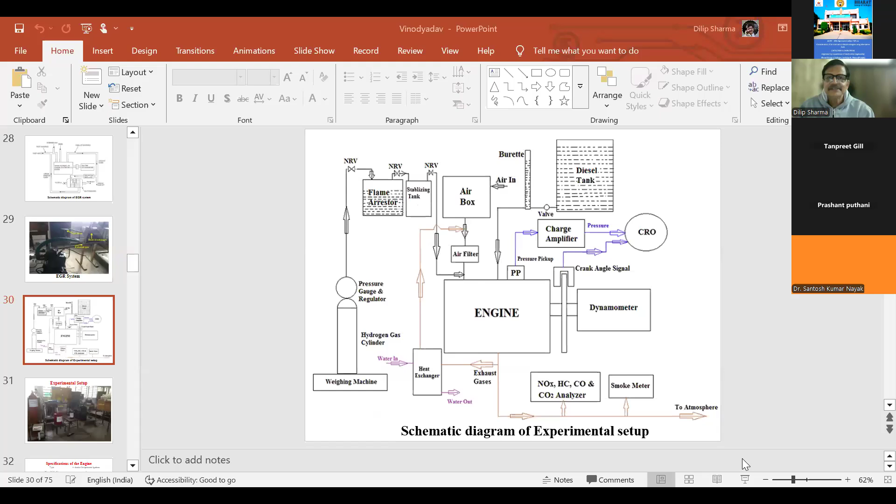Sir, the presentation is not visible, sir. Okay. Just a minute. I thought my presentation was visible. Is it visible now? Yes, sir. Okay. I'll quickly move back.

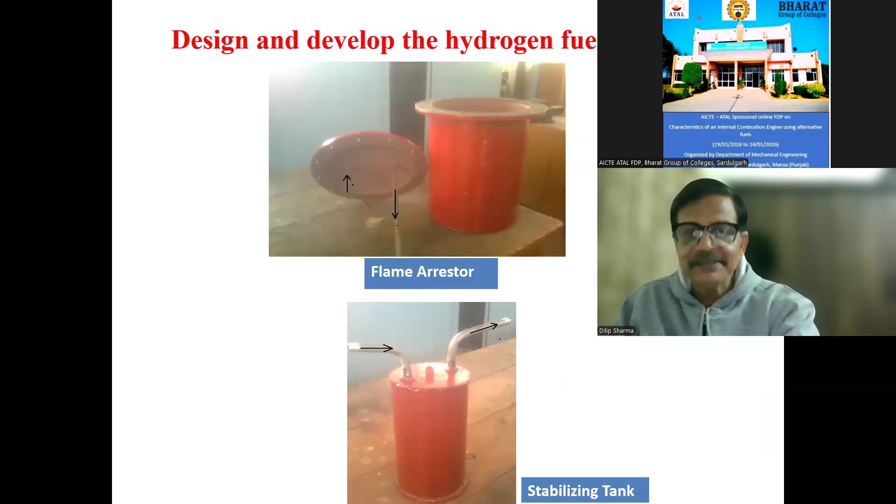We developed a flame arrestor and a stabilizing tank. And then finally, this is the design of the experimental setup engine. We used a weighing machine for hydrogen, because it's a gaseous fuel, so the best way is to measure the fuel supply on a mass basis. So we kept the hydrogen cylinder on a weighing machine, which continuously provides its weight.

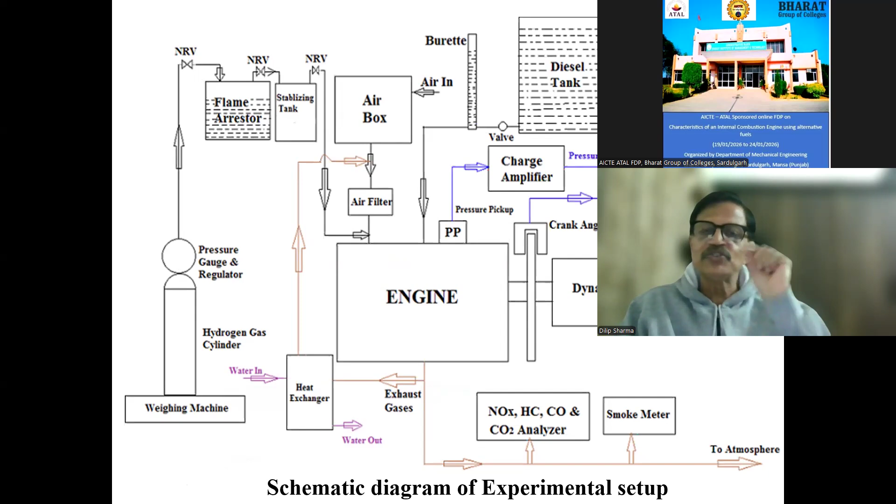Then it was passed to a pressure gauge and a regulator, and from here through a non-return valve to a flame arrestor, another non-return valve to a stabilizing tank, another non-return valve, and from here we supplied it into the inlet manifold of the engine, and air was added in the inlet manifold. So in a diesel engine, we supplied an air and hydrogen mixture, and diesel was used as a pilot fuel to initiate the combustion. So that was the simplest method of using hydrogen.

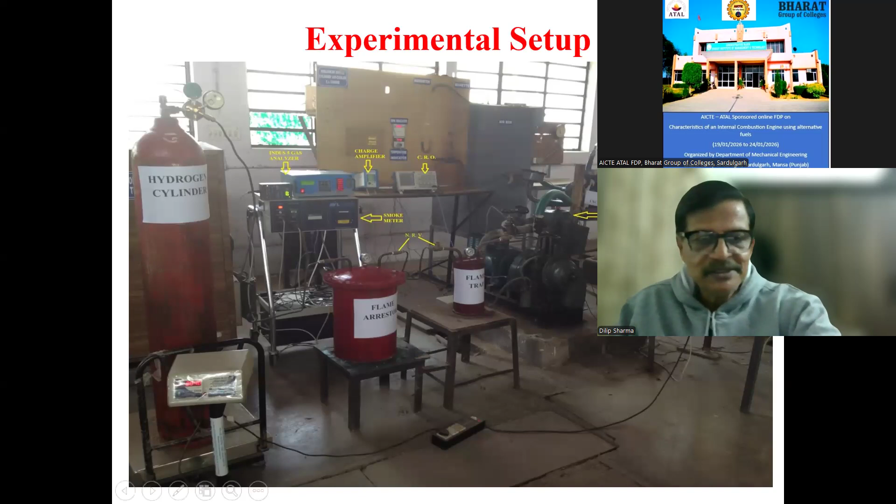Here you can see the entire experimental setup: hydrogen fuel tank, weighing machine, a flame arrestor, flame stabilizer, and the emission analyzers and so on. So that was just a flow of the experimental setup which we used at our place. So any other question?

Good evening, sir. First of all, thank you so much for the wonderful presentation. Sir, can we use oxy-hydrogen gas in place of hydrogen, sir? And your suggestions on that. So you mean to say instead of using hydrogen, hydroxy gas, right? Yes, sir.

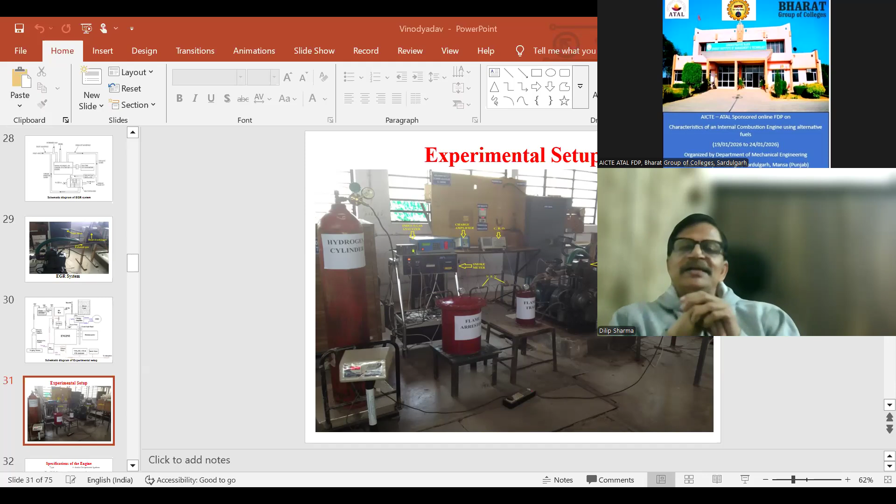Hydroxy gas is already being used at various places. Two of my PhD scholars have used hydroxy gas, and it's very good. And many of the trucks in the USA are using hydroxy gas because it is an additive. When you're running the engine, you use the electricity produced from the engine to produce hydroxy gas, and the same gas is fed back to the engine, and that reduces the percentage of diesel or petrol required in the engine.

So hydroxy gas is very well suited for internal combustion engines. Though it doesn't have that much calorific value, it is equally applicable, and people are working in this area. Thank you, sir. Thank you so much. Right. So, any other question?